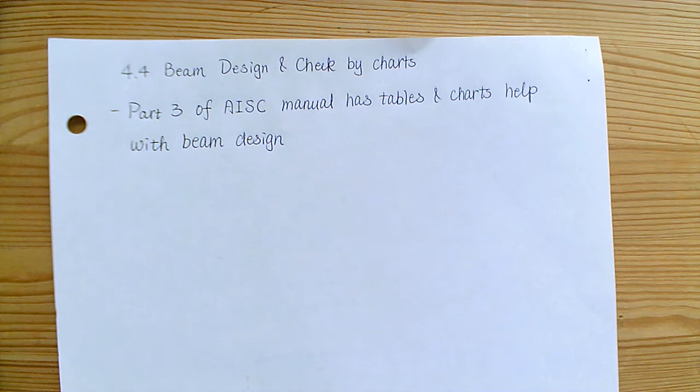So today we are going to learn how to use the AISC design manual to do the beam design. Let's grab the steel manual.

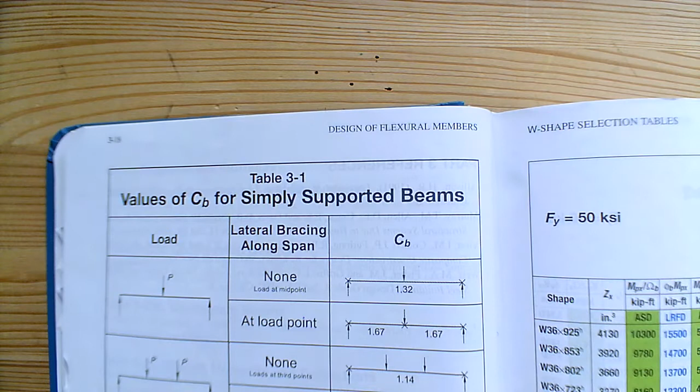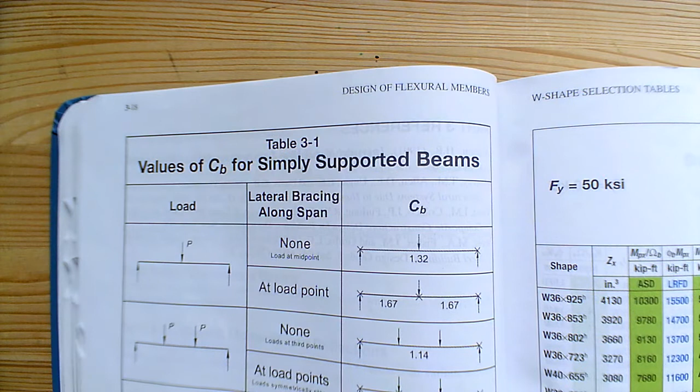This is part 3 I just mentioned. If we go to table 3-1, you can see the calculation for the CB value, which means if you have a simply supported beam under concentrated load and lateral supports only at the support, your CB value will be 1.32. Make sure when you use this table, your situation, the boundary condition, and the load condition need to match every picture here. Otherwise, you need to go back to chapter F and use this equation to calculate CB, which is F1-1.

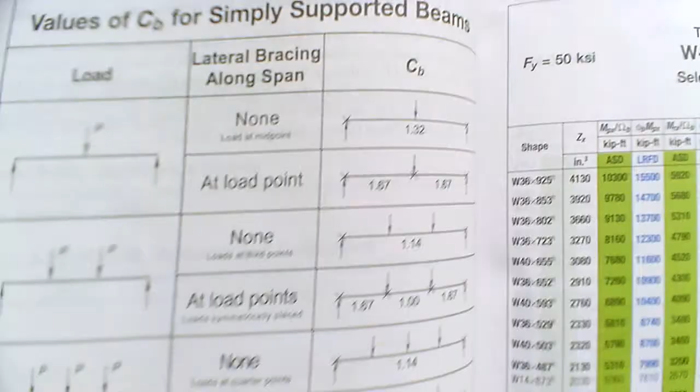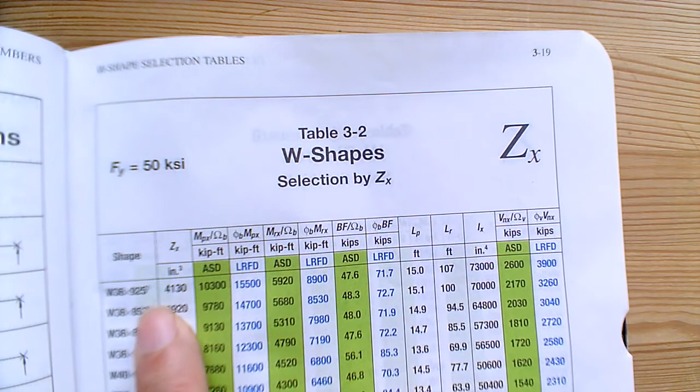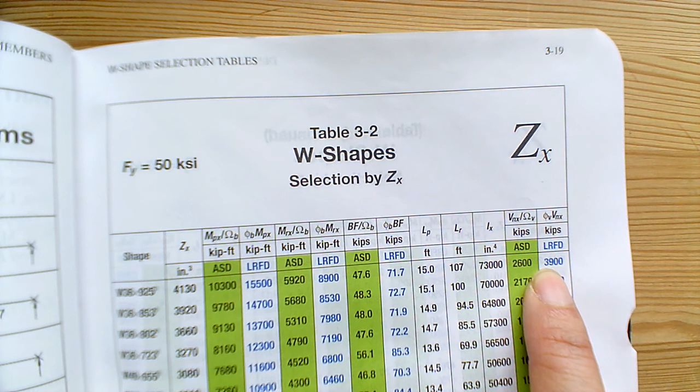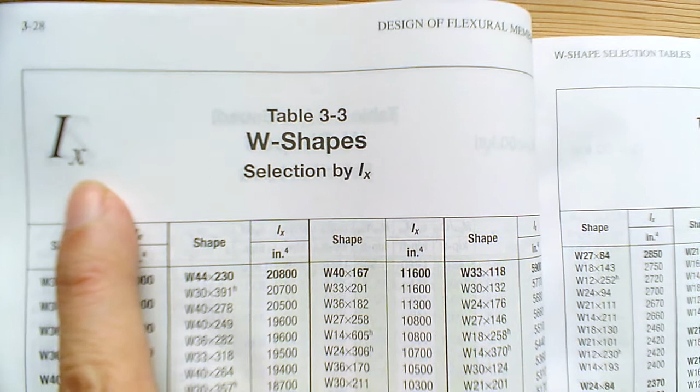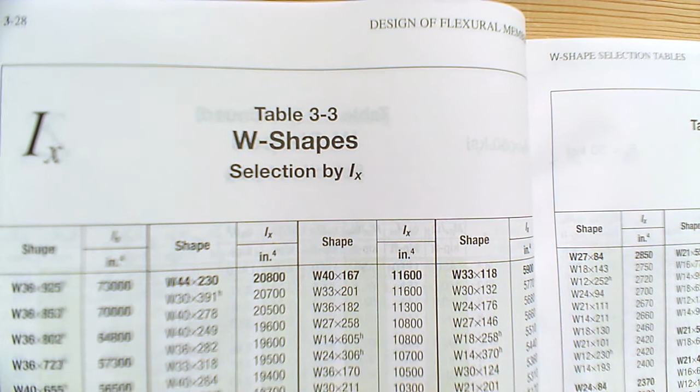If you go to table 3-3, that's actually organized by the moment of inertia. You can find all the information in table 1, but this is just another shortcut so you don't need to go back to table 1 to grab all the moment of inertia.

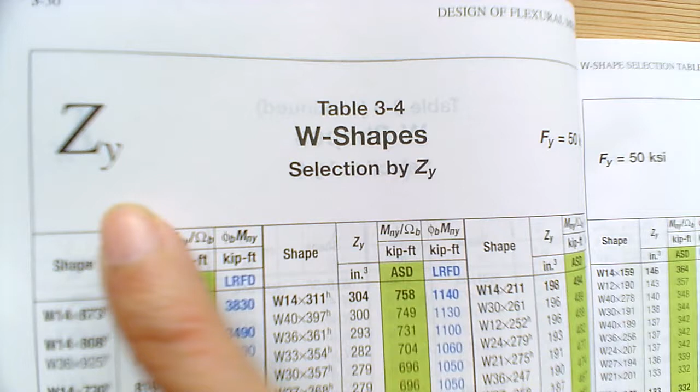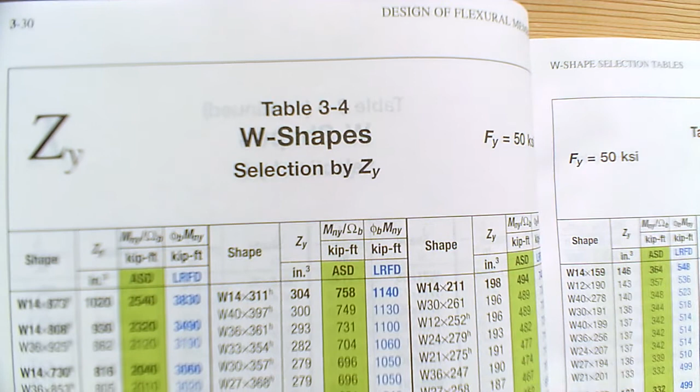So table 3-4 is actually going to be the ZY, which means if your beam was set in the weak direction and you have to design your beam using ZY, you can go to this table to find out all the values. And table 3-5, again, that's a property for the IY.

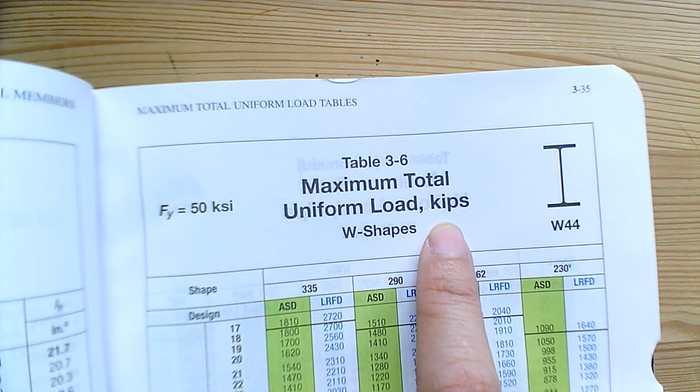If you go to table 3-6, that's actually going to be the I-beam under the uniformly distributed load. It's very similar to the compression member. If you have the load and the length, you can try to read what is the maximum moment you can handle for your beam.

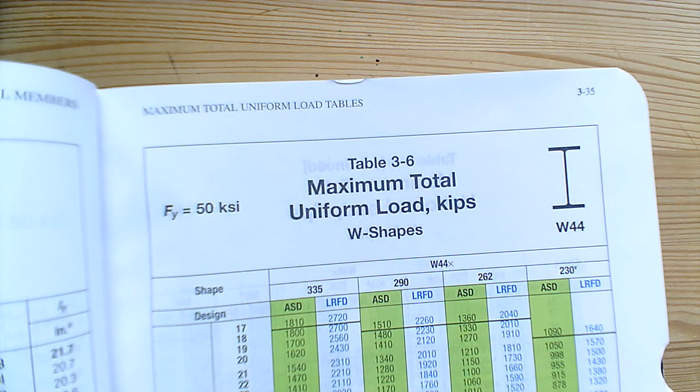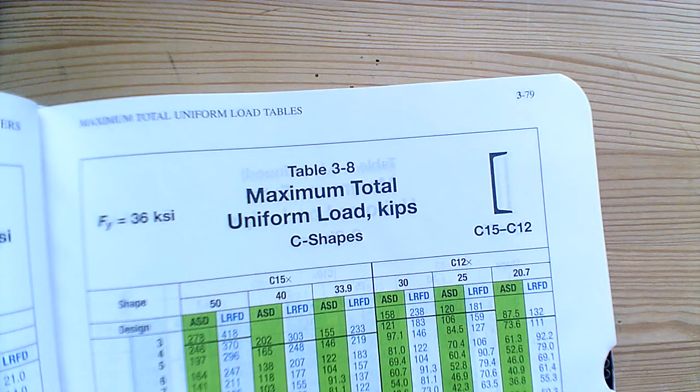And then table 3-7 will be the same, but for the S shape. Table 3-8 will be the C channel under the uniformly distributed load. 3-9 will be the MC channel.

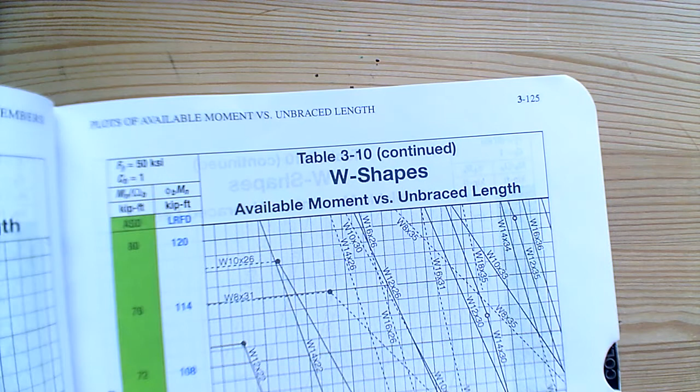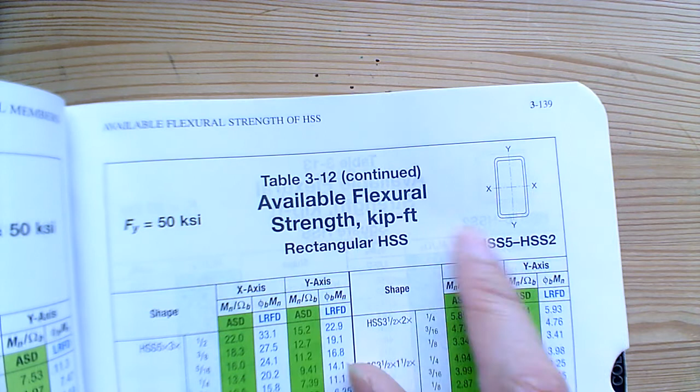And then we are going to go to table 3-10 and 11. I'm going to talk about this later after I introduce table 3-12. So basically 3-12 is if you are going to use HSS as your beam, you go to this table to find your section.

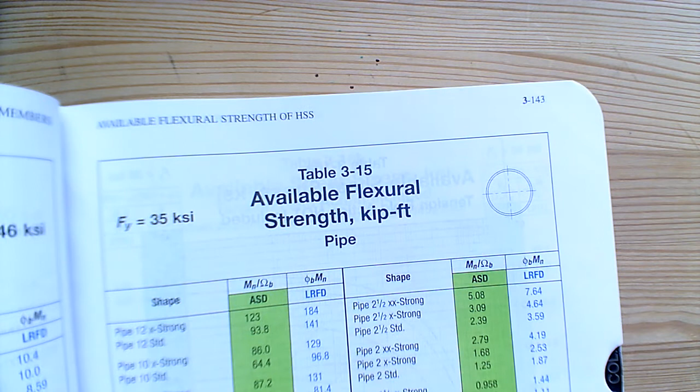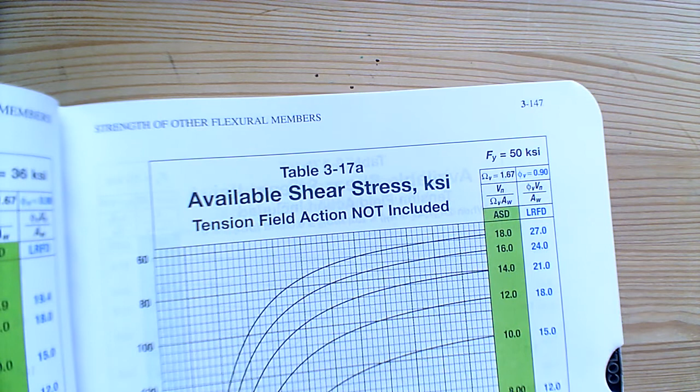If you are using the pipe, then you are going to use table 3-15. And then the other charts here, tables 3-16 and 17, that's actually for the shear. We are going to talk about this later when we do the shear design.

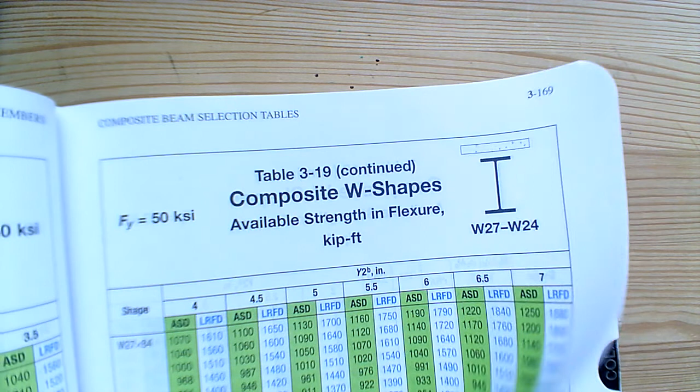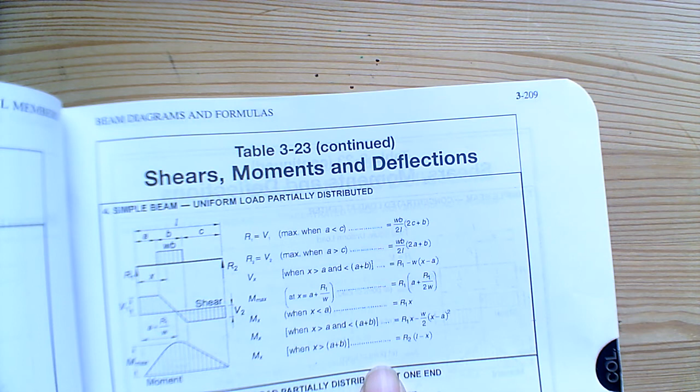And then if you keep flipping, that's composite W shape, which means if you are composite with the concrete slab, then what you are going to do. But if you go to table 3-23, that's what we are going to use later for the deflection check, or you can try to check with the moment diagram to help you calculate CB if needed.

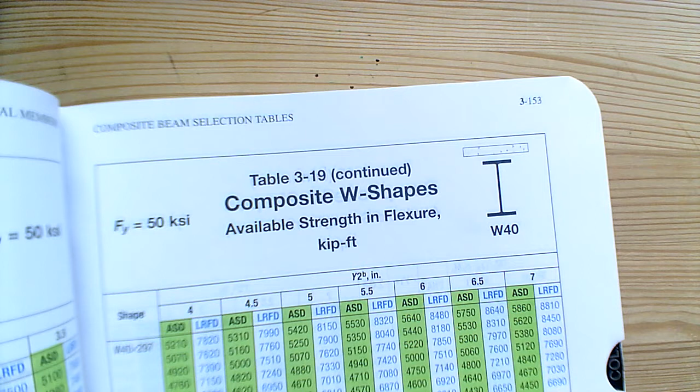Alright, so let's go back to table 3-10. You can see a lot of lines here. What are those, right? That's what you are wondering.

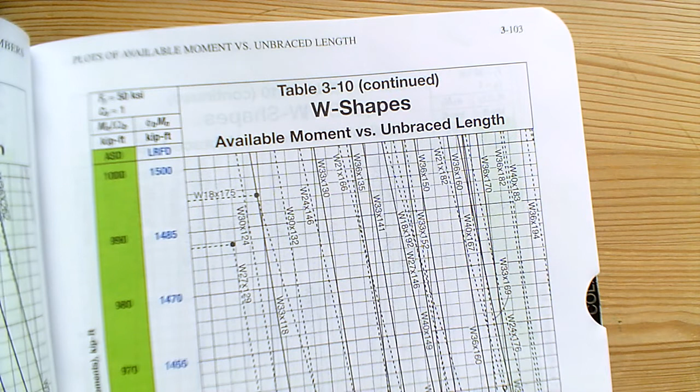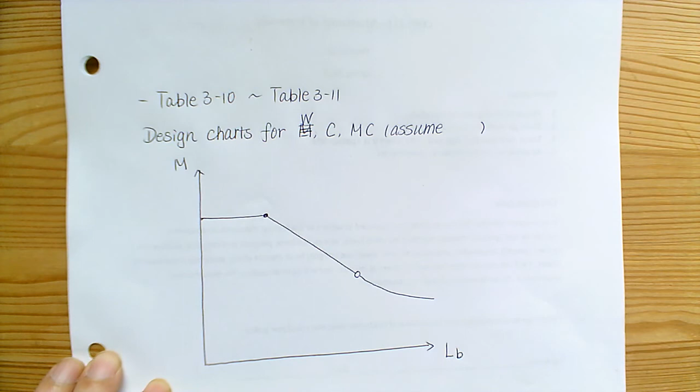So basically table 3-10 and 3-11 is actually the design charts for the W section—I wrote this wrong—the C channel and MC. However, whenever you use this table, keep in mind the CB is actually equal to 1 for all the tables.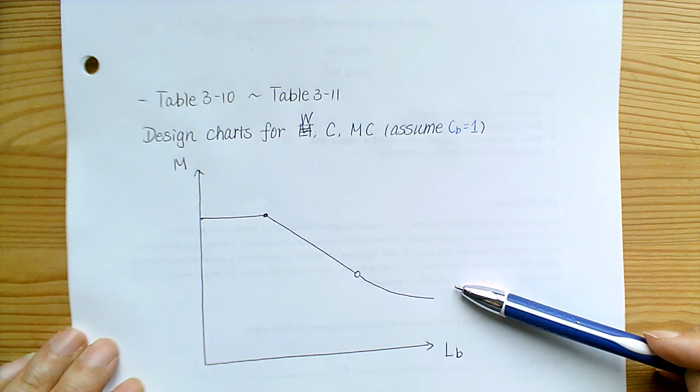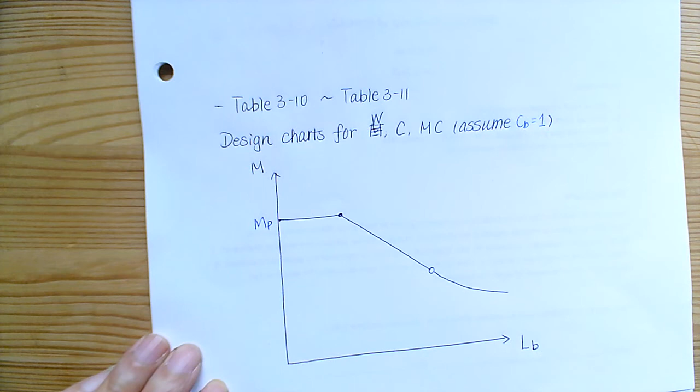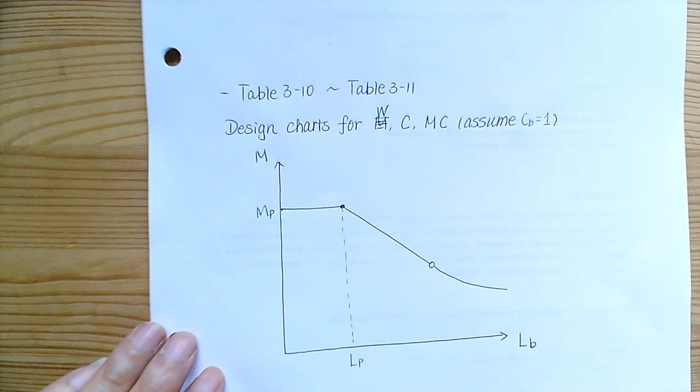And basically every W section or C channel is going to have a curve like this. However, they are so big, that's why they have to be broken into several pages to finish the charts. No matter what, we need to keep in mind that this horizontal line here means the plastic moment, which means you are going to use the plastic section modulus, which is Z, to do the calculation. And the length respective to this is going to be LP, the plastic unsupported length.

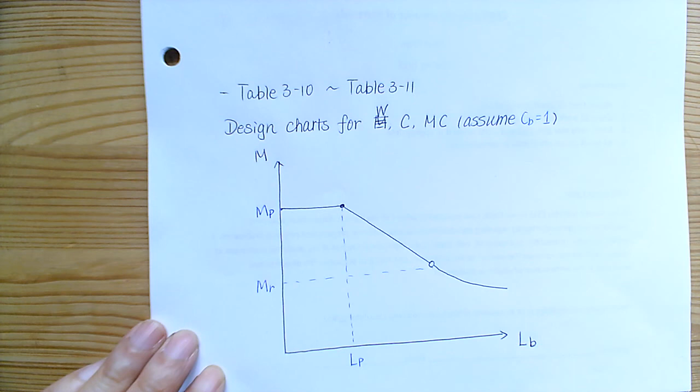And then we are going to have another critical kind of moment here, which is the elastic moment. We can calculate this by using mechanics of materials. And then the length here is going to be called LR.